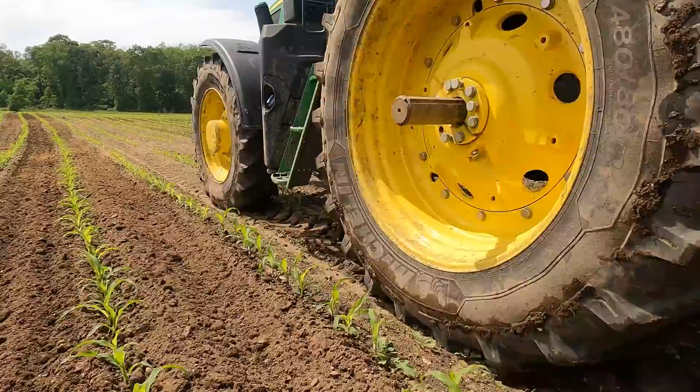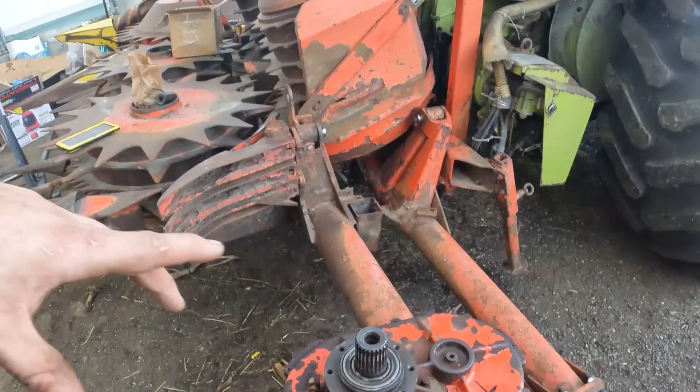So previously, we ran out of some bolts. I had Andy helping me, but I'm by myself today, so we put in new bolts. I do have this broken one, and I got to figure that out. I might have got something figured out, but supposedly that cylinder is here. I don't know where it is though.

Previously, the farm went through my stuff and took things that they thought were theirs. There's a lot of stuff that's actually missing. At this point, it's water under the bridge. I'm being a bigger man about the whole situation, but I still can't even believe it. They also owe me about $10,000, so that's where the struggle is with a lot of that stuff, and everybody except for my brother is against me on the farm. So that's where we're at, and that's the end of it.

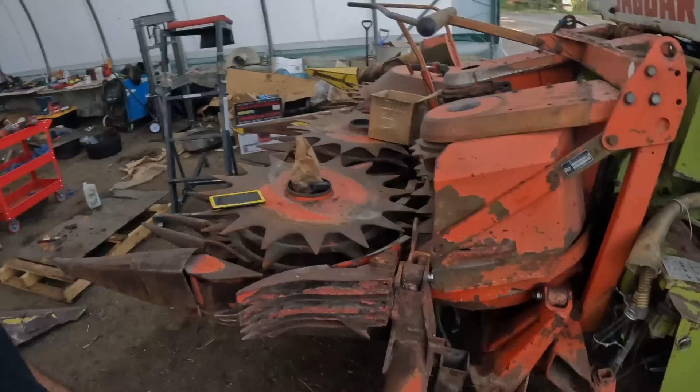So whatever, I'm trying to get my stuff out of here. Like I said, once this gets together and loaded on a trailer, it will not be coming back here. It'll go somewhere, but I've got to get this together, get that together, corn planter loaded, stuff like that. Stuff that I don't need to keep wrenching on to finish up, all that stuff can leave. But appreciate you guys watching along.

We're gonna dive into today. Hopefully I can get this buttoned up. I'm by myself, like we said earlier, Andy's doing school to finish up his hours that he needs. So I did get bolts, I did get taps, I did get everything. Hopefully we can get that bolt out. I gotta find that cylinder though.

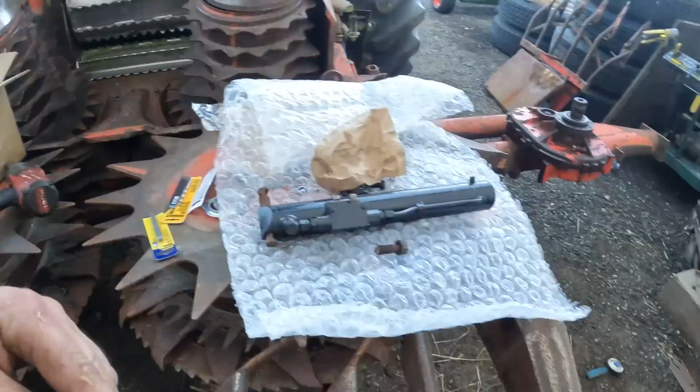Would this have been easier without all this stuff on? Yeah. Would I have been able to put this on by myself? Probably not. So I got new bolts for it, we just gotta sneak it in. The only thing I didn't get was a new bolt for the end piece, so I might have to run and get one of them, but at least if it's in there, I should be able to line it up and get it going. That's what I'm thinking.

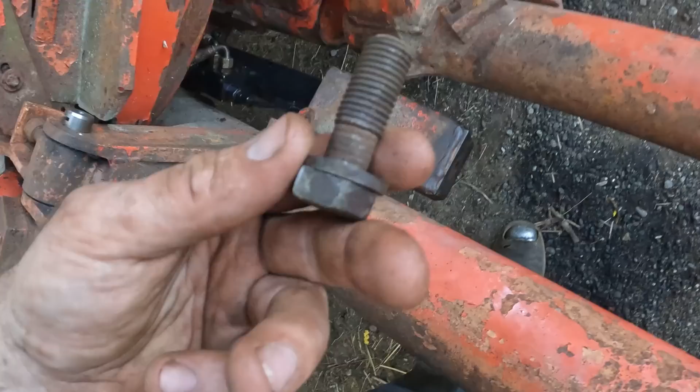Maybe, really messed up by not having that. I'm gonna have to get that, because if it doesn't tighten up, then it rattles and it doesn't fold all the way. It should fold all the way. Push it out, I don't know. But when you're missing that many threads on something, and it's not that thick that it goes through, so that might be to there. So alrighty, that's one thing we got to get.

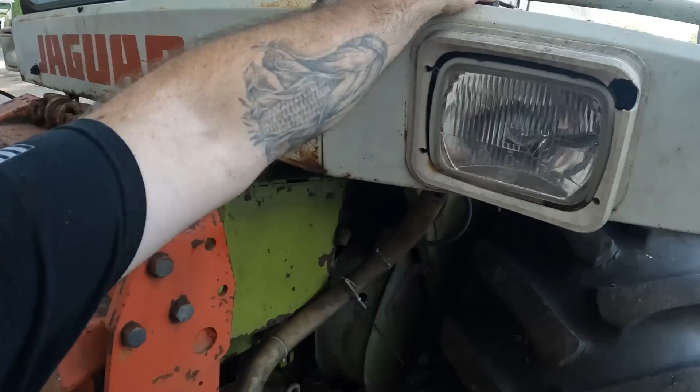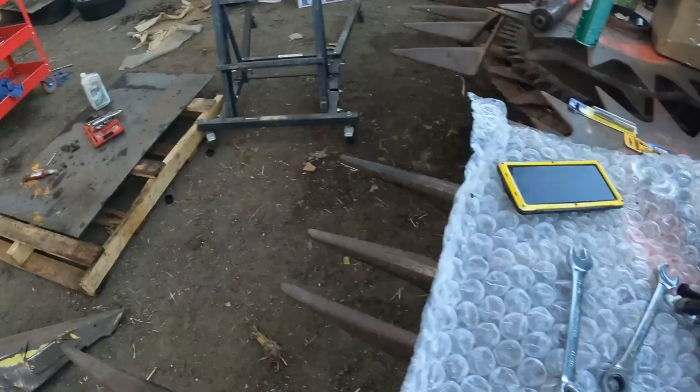Remind me that is there, because I'm gonna forget in a few minutes. But pistons are on, lines are on, we're actually all good there. Gotta drill this, and I gotta tap both of them, so we're good. We do got the pins that hold those. I got the other grease fitting.

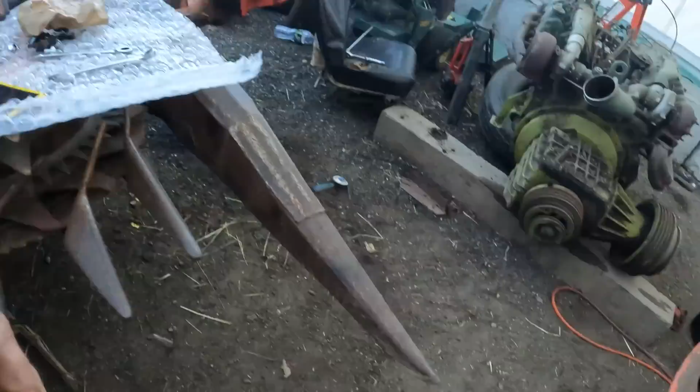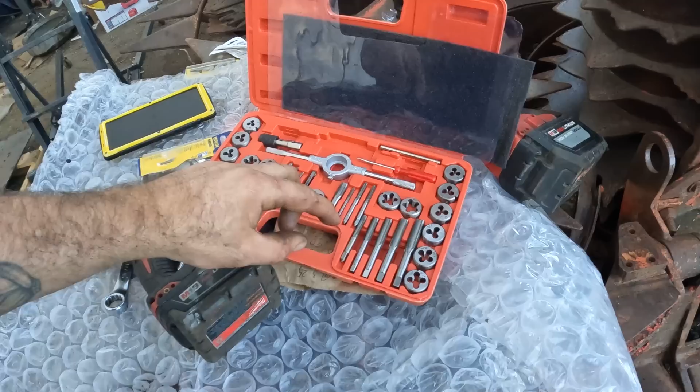Again, see, look at this. Metric 8 by 1.25 and 12 by... goes to clean these out. And I got something for that, you guys will see. Yes, I got a tap set. I forget who actually sent me it, so I've used it some, but it's all standard size. So like that, 1/2 inch is the biggest.

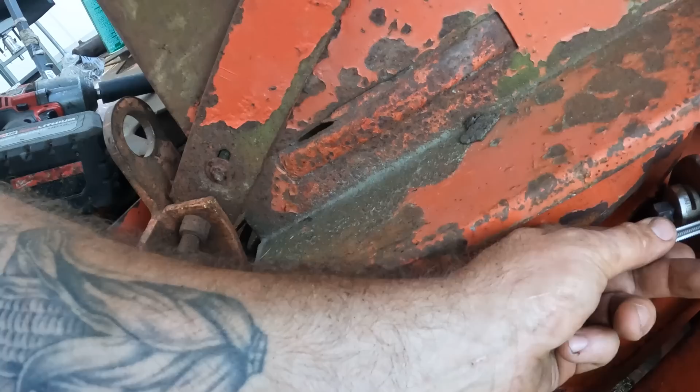Everything on, well this and that, I guess just these, yeah, all of this is metric. So I got that one drilled. We're gonna tap it, we're gonna clean this one up because that's all rusted out. Then we can put the clips in that hold those on.

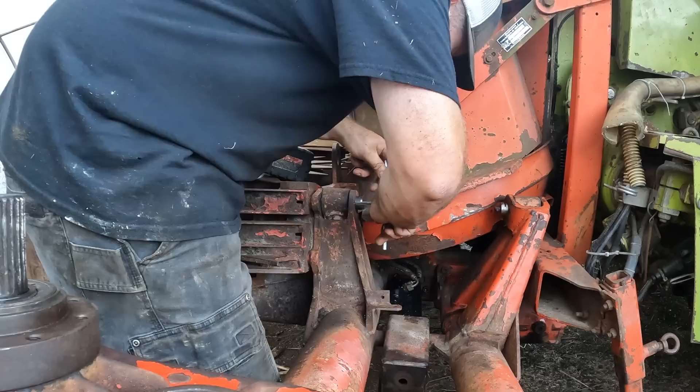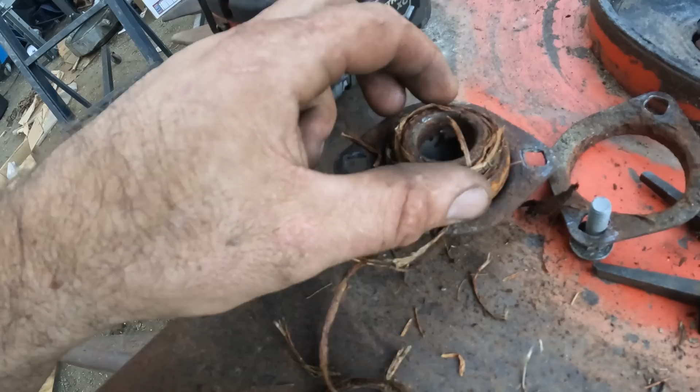It's not ideal, I should have done this when it was out of the machine, swapped them over to the correct ones. Where's my one I just took out? So this came out of the one side that looked better. And as you see, that's pretty junk, and then that is split all the way down the middle.

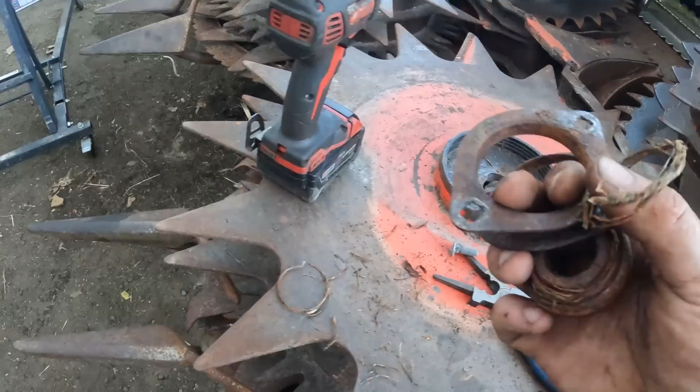So these just sit inside of here. Technically, that's how they're supposed to sit, but they don't sit on, see that? These other ones, they're gonna sit right down on it. Should be good to go. But that one was junk, I thought that one was halfway decent. So throw that in my junk box.

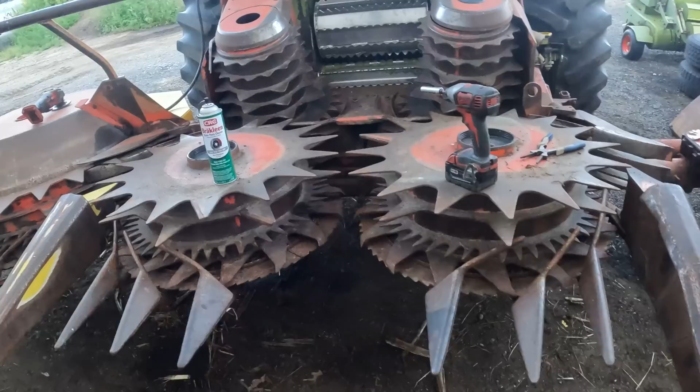Okay, so I gotta pick this up. Problem is, there's 2 bolts here that I need another person for. I took them off, I don't know if I can get them on.

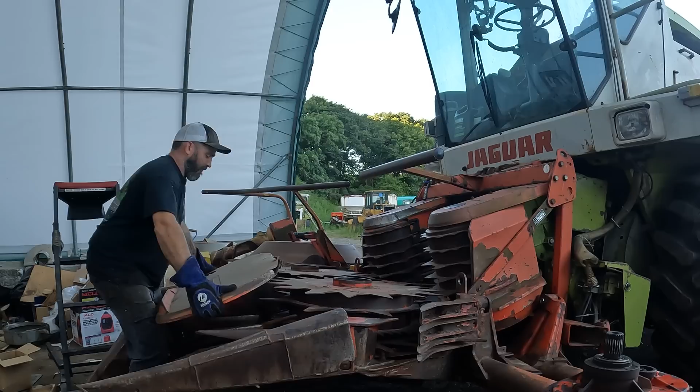Caught underneath. Uh-oh. Oh, that's cool. That looks better.

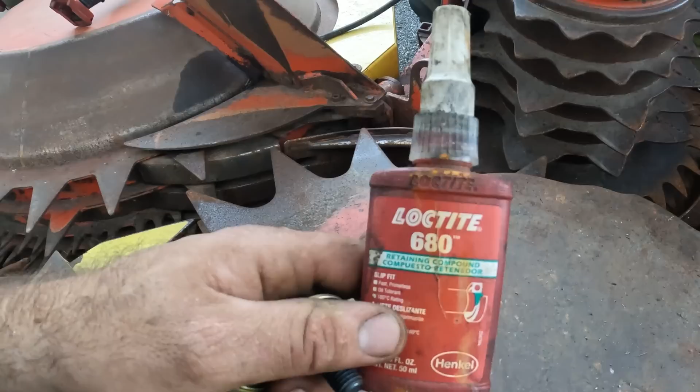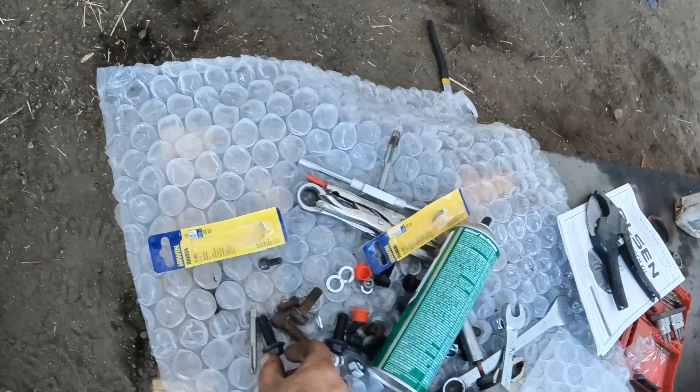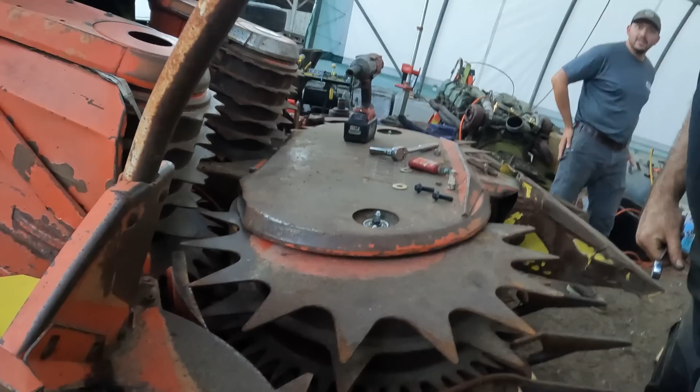The good stuff. Bolt here, bolt there, bolt here, and 2 underneath. I did get all new bolts, so you guys can relax. See? All new bolts, they're down there. We just got to hold them, and we got a celebrity Ross here, gonna come into the channel and zing those on, and then that should be halfway decent.

Loctite, man's best friend, right? That's the good stuff with Loctite too.

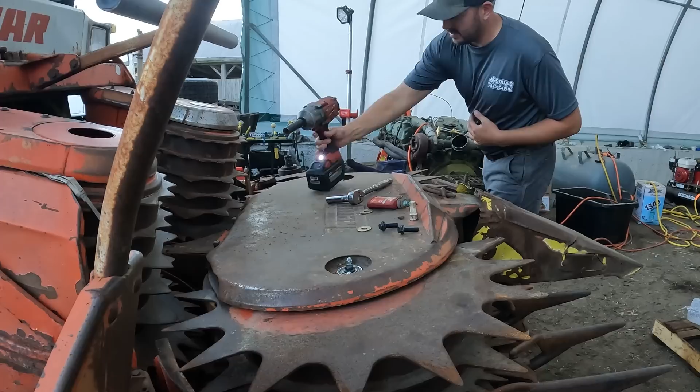One on the left in the back. Wait, you see them? Oh, you're talking all the way. All I gotta do is those 2. You're talking about my left? Yeah, your left. Go slow because it's not snug yet, so I'm barely holding it. You can go faster than that.

A little more, a little more. Good. To the other side.

Oh, you got shit in my eyes. That's cool. Rust? Huh? Good tetanus? Yeah, rusty.

Hold up, there you go. Keep going, a little more. That should be good.

Sounds tight. Are you bringing the Mac over there? No. To Sterling? Just a chopper? He's got his trucks.

Maybe they get to operate the skidder again. I hope not. Why, things suck? No, the thing was sweet, but boy did that take the fun out of it.

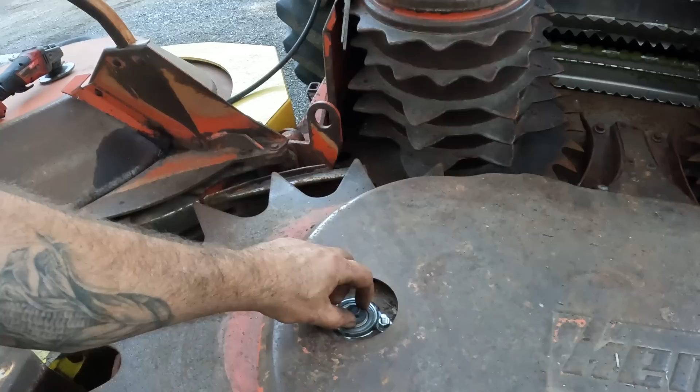Middle setup, all in, tight. Hopefully this is better. Before we had them sticking up. Maybe that was our issue, it was wobbling around at the top. I'm not sure, hopefully that's not it. Or hopefully we solved it and put new bolts. So all the hardware there is new.

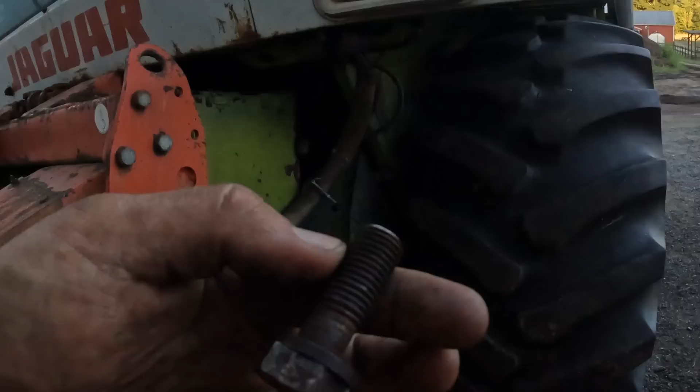I gotta go get this bolt before we get too far, before it gets too late, because we need the threads to exist so that we can put this in, because then we're gonna put the big drum on, and from the big drum then we can put the side pieces.

Hopefully all my hardware from the big drum is still kicking around. Yeah, there's some nicks out of that, but we're okay.

Yeah, that's supposed to slip like that. It spins over when you're not doing it, but this one is locked to that collar, which is good. Let's go get this, hopefully that's it for our hardware that we need.

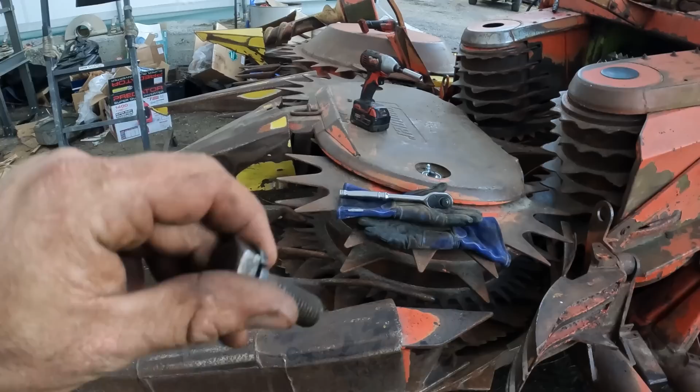I don't know how I missed it this morning. Then set that on. Well, lights are on. Got a bag full of bolts. I got all sorts of extras because honestly I should have just bought tons and tons of bolts, but freaking things are expensive at $3 a bolt or whatnot. So I think the one that goes there is $5, and I didn't even think about that.

But lights are on. Keep in mind, we're gonna have another late night. This morning I went to bed at 1, got up, went to work, worked a full day, and then I'm back here doing this. So that's why sometimes the content is minimal, not as wild and exciting, but I appreciate everybody that watches along, because we're slowly gaining.

Someday all I'm gonna do is farm. That's my plan. So there's the old one.

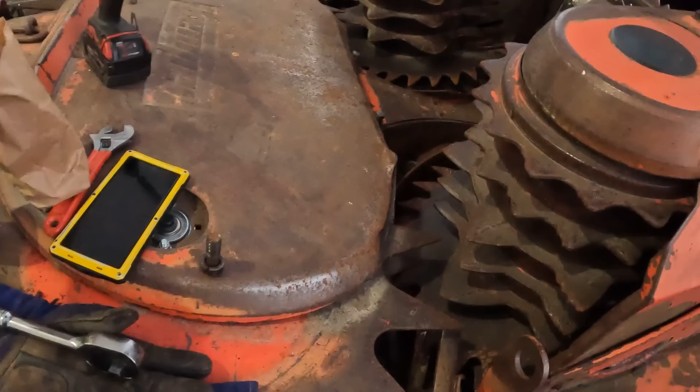You can see there's no threads. It's in here somewhere. Hot dang, right there. There's a new one.

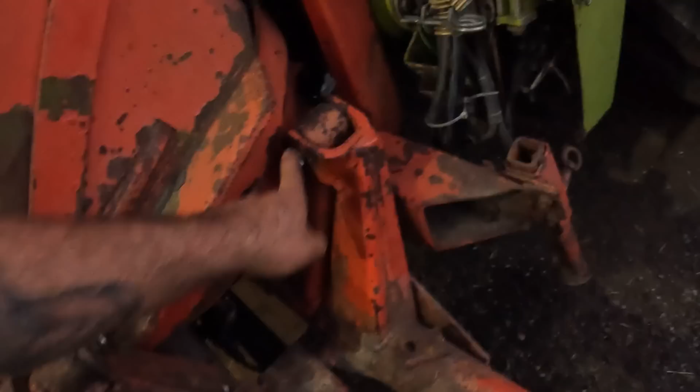So we'll get it tucked right in here, and then that bolts into that, which then means I can put this on, put the drum, which I gotta go get them. Between new pins, new cylinder, new bolts, welding this up.

Very little play, which is good. That's how it should be. Yep, it moves.

Okay, that's a win. So last fall, my head wasn't folding all the way up, and I'm sure one of these was messed up, and I don't know if it's that side or this side. It would fold, but it would stick out some. So I'm learning on that.

So from here, we're good actually on stuff that way. We still got to figure out tapping these holes and stuff, but I might put a washer there and just tack it on. There's not going to be much actual play out of those. They rust off and break off because of the other side being open, but

Alrighty, easiest way to get all that stuff back over here.

So when I took them off, I used an engine lift, but we'll jump in my pickup, which is still hooked to the gooseneck, back over there, try to get everything on that. I have not figured out my issue on my pickup yet.

It didn't act up much. Little update, I stopped and got dinner, and I unclicked traction control, and it never did it again. So I'm wondering if something's tied together. There's everything from people saying ECU to wiring to sensors to all sorts of things to battery.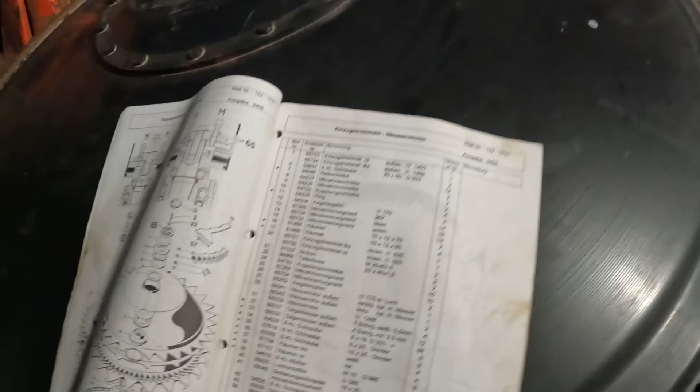Ron, so he hit me up the other day. He's like, it's neat seeing my handwriting in there. This book is sweet, even though it's in, what did we say, German?

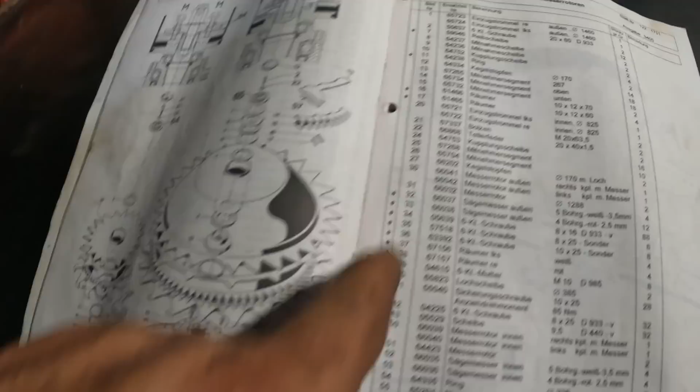Somebody said it. So, number 2 is that big bolt coming down through the top. That is a 20mm by 60. I don't know the thread of it, but if there's multiple, we'll get them. Then number 41, which is right here, and it's got the torque spec underneath it of what it's supposed to be torqued to, 85 Newton meters.

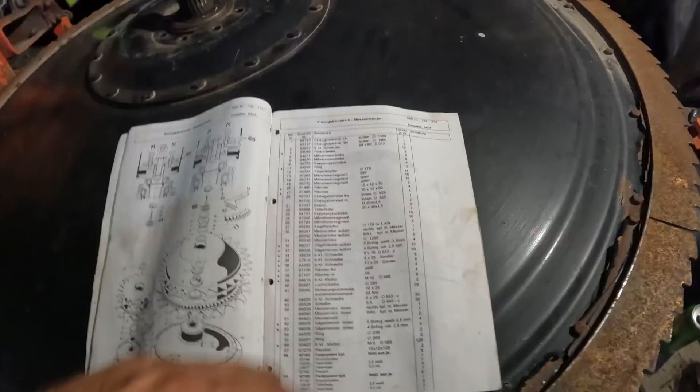So that's a 10 by 25, so 10mm by 25. We'll have to grab whatever torques we got. And then, yeah, I didn't put that on because I got to get gas for the torches.

So I did get torches. I guess I didn't tell you guys that, but I got torches. We just need to get, I got a torch kit from, well, Harbor Freight. But alrighty,

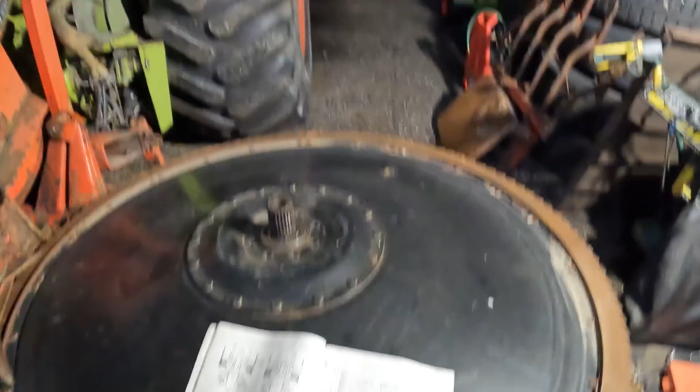so we need to go get those. I'm bringing this book. That is the moon. I don't know how it looks for you guys, but it's a hell of a moon. I wish I had caught it rising.

It's actually beautiful out, but working in the dark. We got a light. Let's see if we can get a little bit more done before we get out of here, because it's only gonna make tomorrow longer, and I have a feeling I'm gonna have a long day at work.

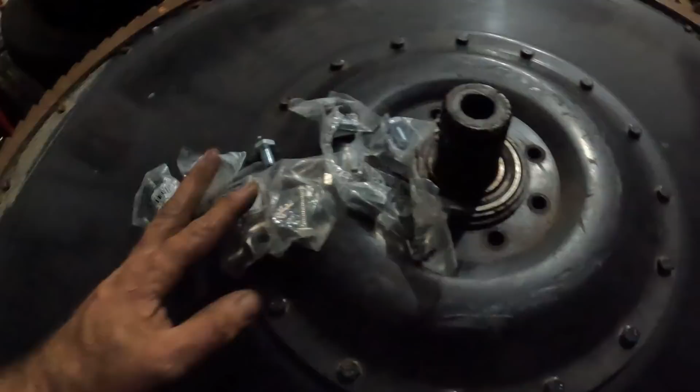Yeah. So this is what we got. We got an assortment, different sizes. It says it's a 10. I did not get the big one because Lowe's is a disaster. That place was so odd.

But that should be it. No, that's tight. So we got to figure out the other. I got 2 different threads. Of course, the ones I grabbed first that I was like, oh, that must be them. That is them.

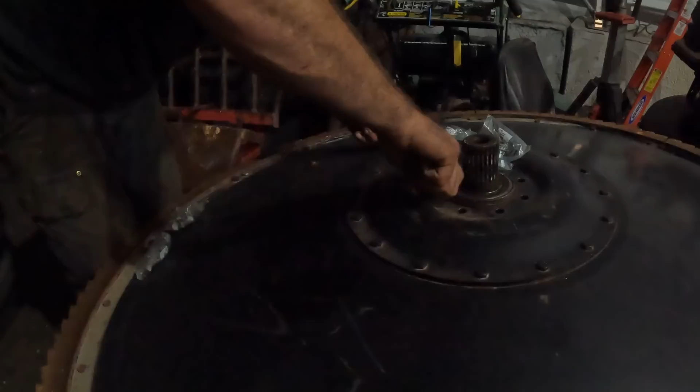Alrighty, so all these ones aren't useful for me. Yeah, it's 10 by 1.5. So these 1.25s are not correct. Good to know, I will not remember that. But I bet that other one is... well no, it's a 20. That's not even the same size bolt at all. Well, I got screwed on that one. Somebody opens these bags and takes what they want, and then people move things around.

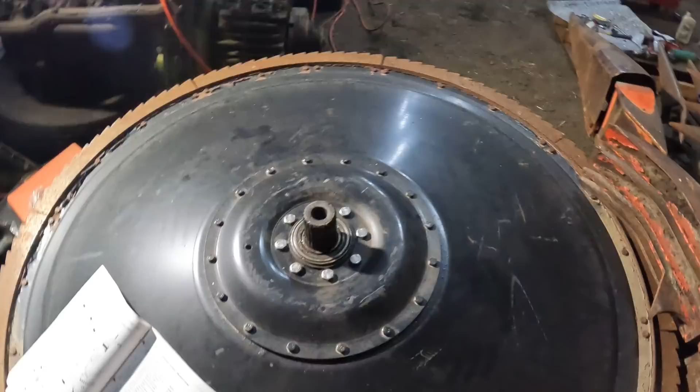Alrighty, let me get these done up, then we can get the chopper backed out. All of them are on. I'm glad I got 8. I did have to cut 3 of them. Well, I got more than 8, but 3 of them had to get cut because they were 30s. The other ones were 25s. It said I needed 20s, but 25s did go all the way down.

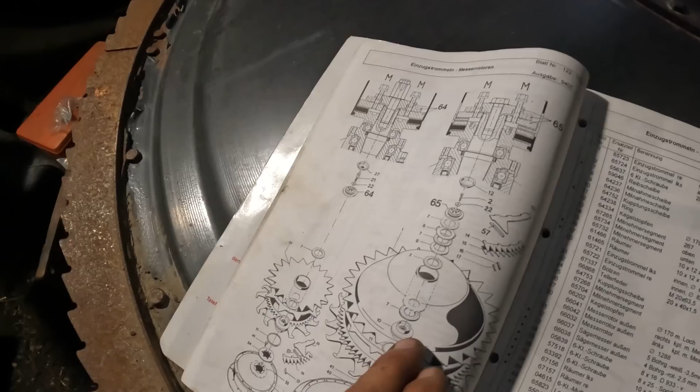Well, they're locked in. That's the whole piece actually moving, so that's actually okay. Alrighty, glad I got this book too. So we got the one base piece that goes on, then one disc. The base that goes on, one friction disc which goes in between the two, then friction disc plate, friction disc, the snap, friction disc, then the top. So let's get that one on there and we'll get it all cleaned up too.

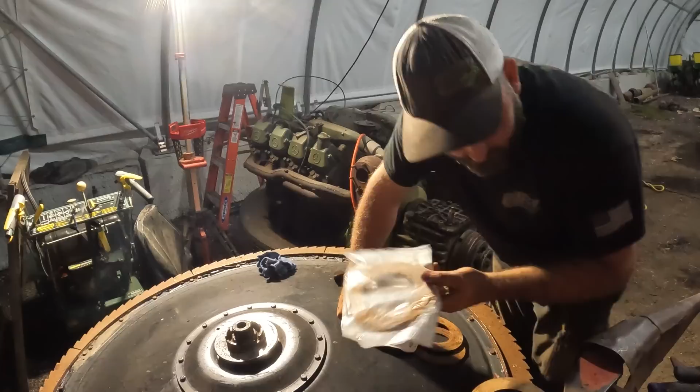So we got these last year up in Maine. I did do a guess-the-price on this, and 2 people got it right. You guys might have cheated, but y'all got a shirt out of it. Or maybe there was 3. One of the old ones is completely gone, but here's 3 out of the old ones. 3 out of the 4.

So here's the disc, one goes on, then we gotta get the big drum. Then these drop down in it. And these are all cleaned up. Big drum, the top clutch, put that bolt in, will be good. So if I can get that backed over, get the big drum on it, unload that trailer, and then back that trailer out of the way, because my brother's guy has got to get in and out in the morning, that will be good for tonight.

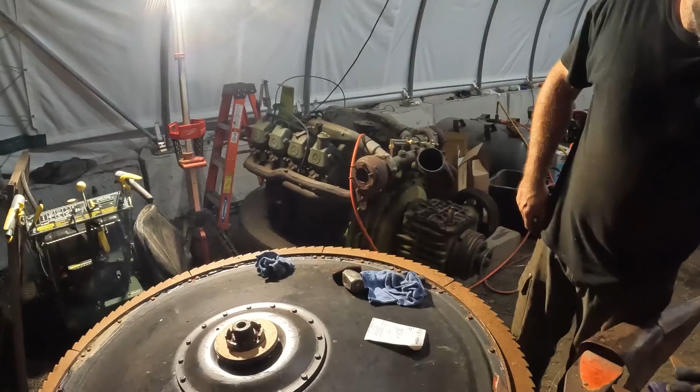What time is it? 9:15. Be an early night. It'll be good.

Okay, let's see if we can back this out without destroying nothing. We're getting wider. Right?

Do got to do an oil change tomorrow.

Looks like it's staying. You've been having a good day? What did we do today? You ran around, you played fetch. I don't know, you must have played fetch for like 30 minutes up in New Hampshire at the one farm we went to. I went to Richardson's and you played fetch again. But he wants to go chase something. Kill things, party.

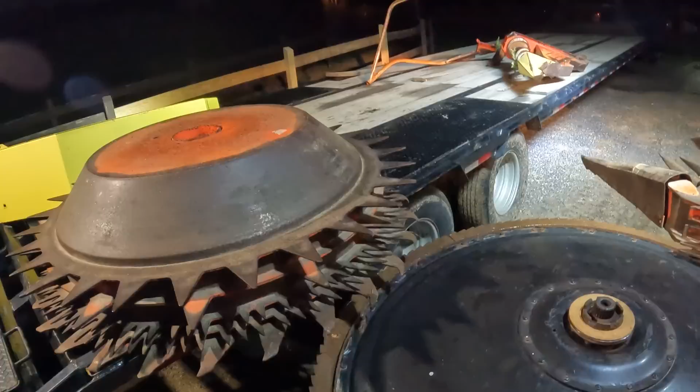Hey, if you got thumbs? You? No thumbs? Come here, let me see your thumbs. You guys think Yanko has thumbs? Let me see your thumbs. Where are your thumbs? What is that? Is that manure? Is that manure? Dude, you smell bad. You ain't, no, you might need a shower.

Alrighty, if you get on the other side, no, come over, go over there. Yeah, jump, jump. If you go to the other side over here and help me with your thumbs. I lost him.

What could go wrong? Where could go wrong?

We're close, I gotta get back over the top of this, and you gotta slide it in the other side. Let me show you, so these fingers and everything go in between here, and you got these scraper plates and stuff like that. Kemper does have a really good video of how stuff works and where things go and what plates and what to weld. I've watched it quite a bit actually. I give him a lot of credit.

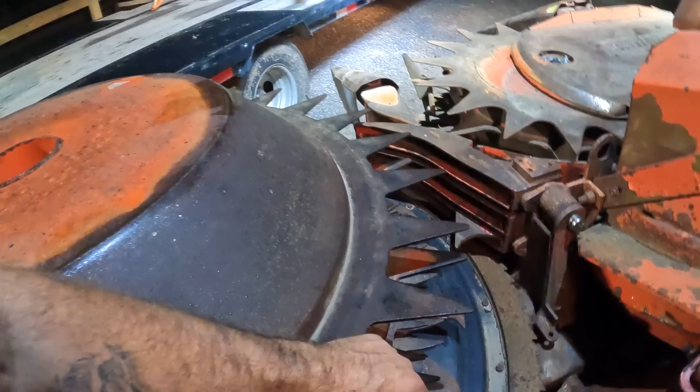This thing still has a bunch of life left in the actual components. And everybody's always, oh you see cracks? This? Yeah, it needs some wipers underneath it, and it needs some love. Like if it had all new fronts, we'd look a lot more appropriate, and the caps. But we're just out here making it happen.

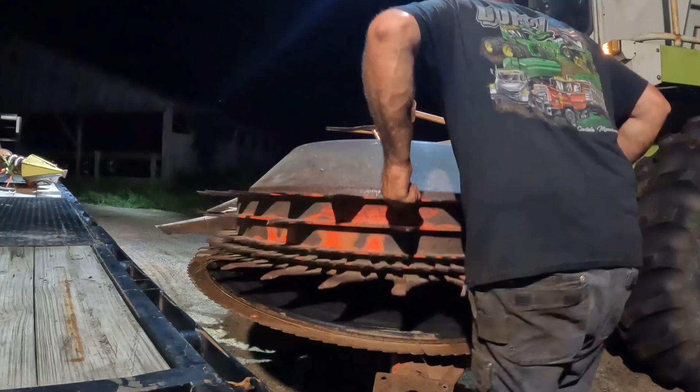It's on. That thing's not heavy, that thing's not heavy, but that is really heavy, and I'm gonna need another person to actually put it on. So that bolt's up here and goes through here, and I think I got all the bolts to do that one.

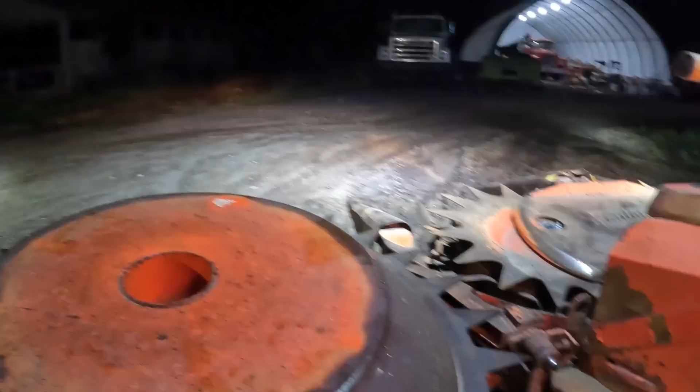Then that back shield just goes from that around, and tucks back. I don't even remember, I don't know. So I'll pull the truck up, back it up, unload those two things. Definitely not enough time in the day today.

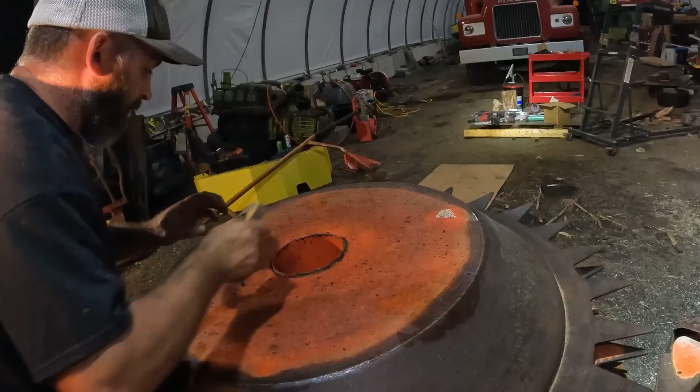Yep, that was good. Yeah, I guess it wouldn't work if you put it any other way. Here we go, so that's in.

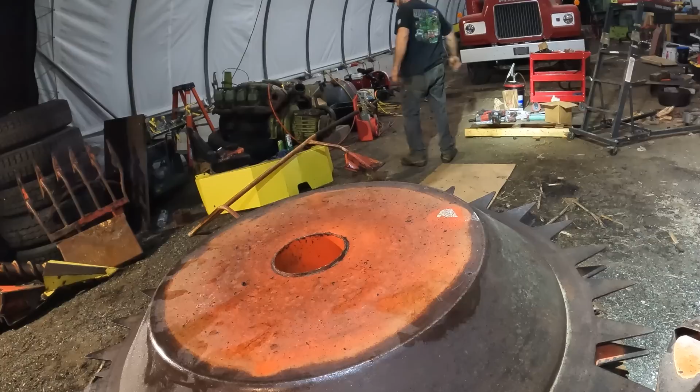How this all works, let me show you. So this is the clutch itself. They're tightened all the way down right now. I don't know if you guys can see, there we go. It's tightening all the way down, which pulls these two pieces together. But when you loosen them up, it allows it to spring out and push force on it. And this just goes down in there, with the bolt of course. Once it goes in, it will pull that all tight.

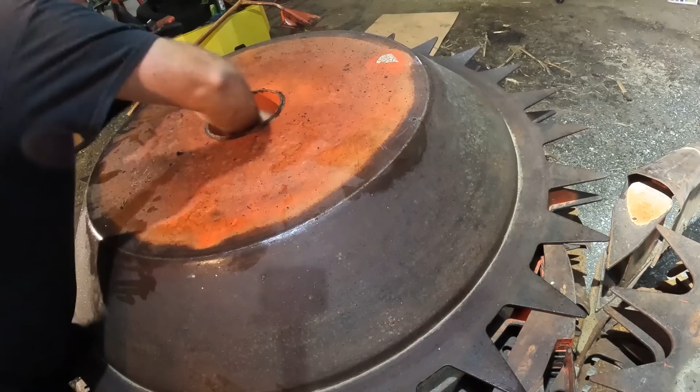Got the bolt out of that one. Also took a bolt because there's two of these that go through here, so we'll get 4, we'll just do all of them. That way they're not rusted and broke off. Even on that side, got 3 bolts that go there. Found one that fits, we just got to get some shorter ones. And then we just got to get carriage bolts that go through here.

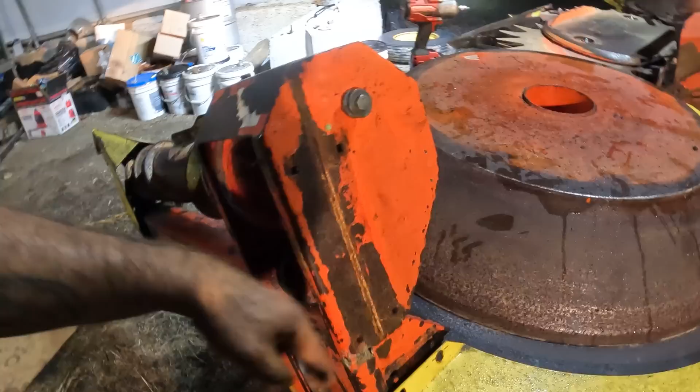I don't know where that piece is. It's white, I know what it looks like, it's flat, rounds over, same as the other side. That's annoying. If I can't find it, we'll probably end up just bungee cording it on, because that just holds the corn, if it comes over, keeps it in line, same as you see over there. But then it can get thrown on. We'll have to look in the daytime for it.

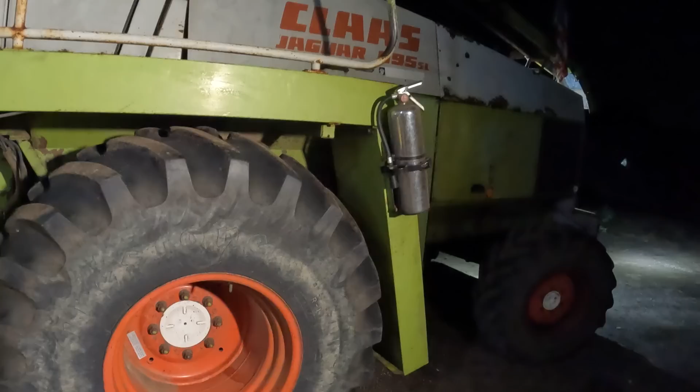So that shield's on, it's just sitting there though. You got to put the big bar on first and then it wraps around. I might give this thing a little bit of a wash down, that way it dries out by tomorrow.

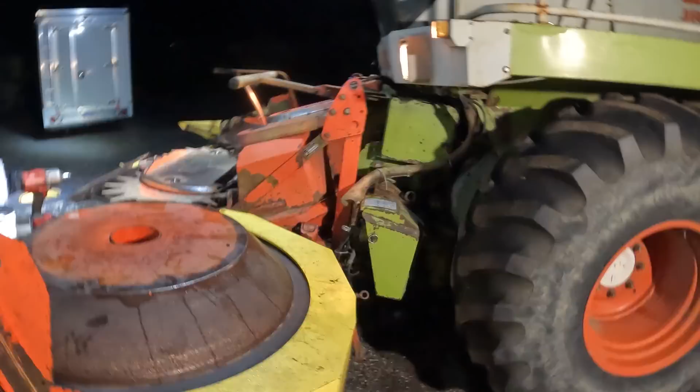I don't know if I'm going to get loaded tomorrow morning, tomorrow afternoon, or Saturday morning. I'm thinking Saturday morning is probably a better bet, because I'd like to change some belts, and we do have to pull the cutter housing out. I'm not sure how I'm going to pull it out, to be honest. Usually I use a skid steer and the wheel loader, because you pull it out, hold it, and then slide the processor in. I've done it where I've pulled it out on the corn head, and then we almost died trying to put it back in. Literally, me and one other kid were underneath it trying to line things up, and yeah, we almost died. So I'm not a fan of that way of doing it, but if I had the right stuff, it might take me 2 hours, but I don't have the right stuff.

So alrighty, I'm gonna give this a rinse down. It looks way more like a corn head than when we first started today. We just got to get some bolts, some hardware, and that's been the story of the life.

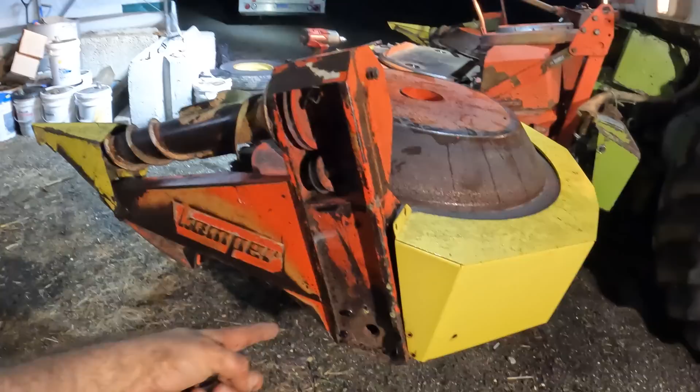I did get those bolts, and they're extremely tight. I was always having issues of them loosening up, so we put 12.9 metric Allen wrench heads there, or whatever they're called. Somebody's gonna get that, right? So that is all good.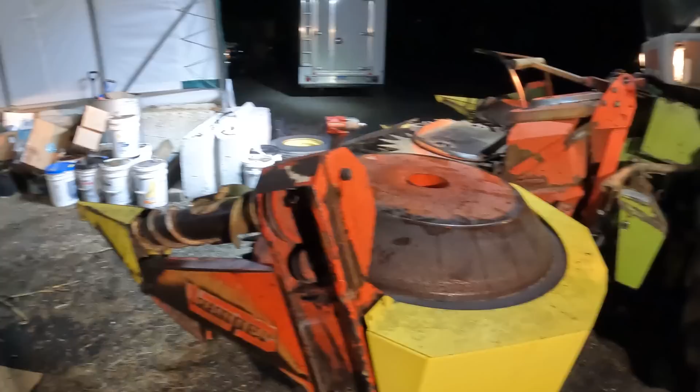Yes, the panel's off on the side. It's always been off, we don't run the down corn rollers. When I got it, it wasn't there. So there's a shaft that comes out, goes to a pulley here, that then runs the belt, that then runs to keep any corn that flips over from getting in. But I don't see the benefit of it for what we're doing. Maybe if we did tons and tons of corn and some of it was laying over and we pulled it in, but I don't see it. Someday when I have a nice head and a nice chopper, maybe that will work, but I doubt it. They don't even put them on the new ones, do they? I don't think so.

Alrighty, what time is it? 11 o'clock. Go give this thing a quick rinse down, and then we'll get out of here.